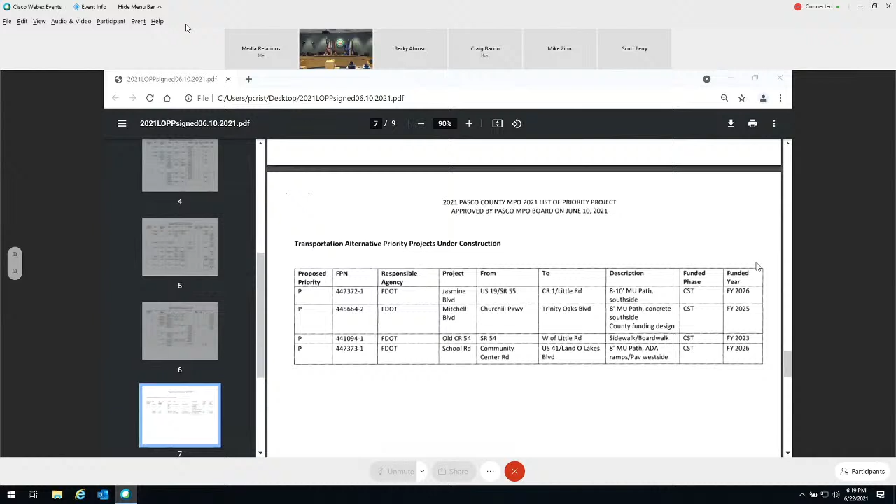All right, so that's our list of priority projects. They were approved by the MPO board on June 10th. And again, as we move forward this coming year, we're going to be ranking projects in a system that you guys get to approve and figure out as well. We'll start that pretty soon as well.

So next, I have one question before we get out of this. I just saw something that caught my eye. Okay, on page 7, what is the status of Pasco Elementary School sidewalk east, 6 foot?

So that one, we requested funding for construction. You talking about going north of Coleman? So if you're talking about that first one there, Pasco Elementary at Fort King and Hester, North Coleman, it's been funded already for the design and the engineering of it. So we're asking for the money for the construction. And usually when you get the money for design and the planning and the engineering of it, there's a good chance that we're going to get money for the construction because they're not going to invest that money up front without investing the money. And usually they work out those fatal flaws in that first part before they go to construction.

So well, my issue is we're doing sidewalk going north of Pasco Elementary School. Okay, if we're gonna do that, why can't we do it before school starts? Because I'm telling you right now, a lot of kids walk that going north. Right, if a kid gets hurt or gets killed, who's fault is that gonna be? Okay, in the same way with Pasco High School, take that road all the way down to Fort King Road, going behind the stadium. A lot of kids walk there. If somebody gets hit, who's fault is that gonna be?

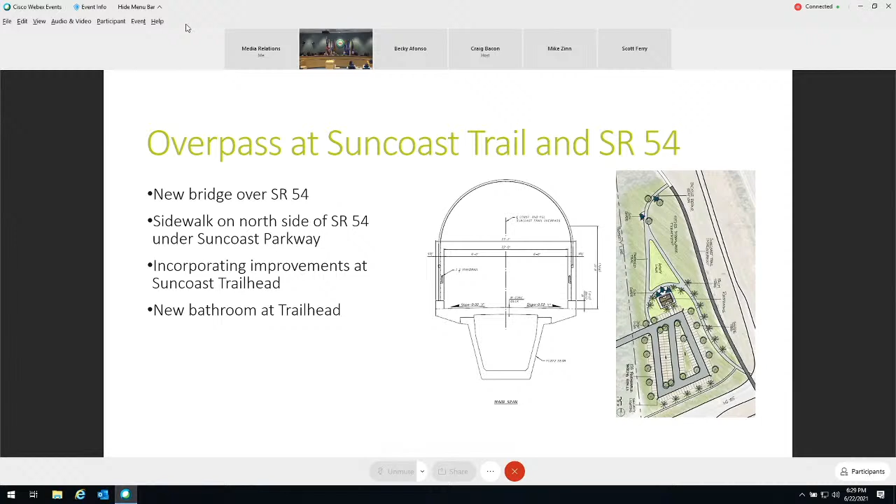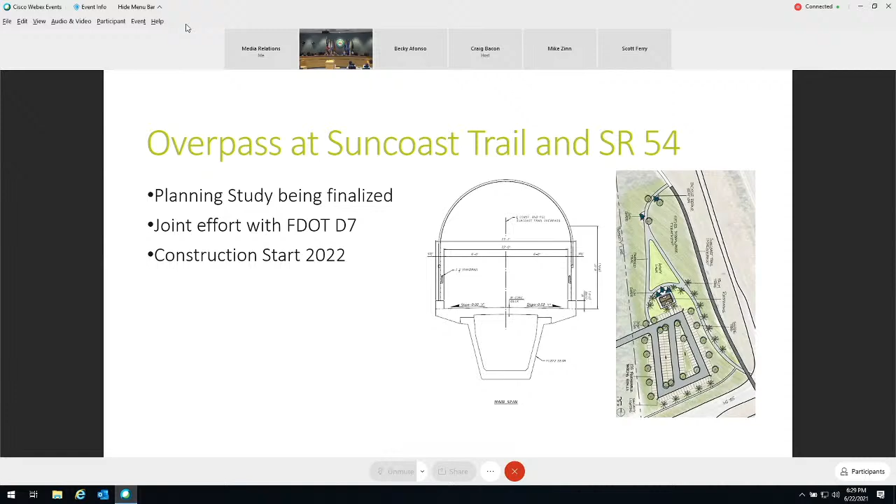So next project, and this is Orange Belt Phase 1, we're gonna call it, and this is the piece that goes along, up to basically Publix there at 54. Now this is just one piece of two other pieces, so it's really hard to tell. But this is at Trinity Boulevard to Cattle Gap Road. Publix is right across from Gun Highway and 54. It will go along that north side of 54 along Starkey Ranch area as well.

We're gonna have that mid-block crossing right there just east of Community Drive. Really great spot for a mid-block crossing. We'll go behind those ponds, so you get kind of away from 54 until you have to. So that's one part of Orange Belt that we're working on now as well.

Tina, just so you know, I'm working with, or trying to work with, all the landowners. So for everyone, that's the Trinity Memorial Gardens there. And then if you get to Gun, you see the old flea market, but that's going away and that's going to be a Lowe's. So we are trying to work with all these landowners in here to do a neighborhood grid. We've got multifamily, townhomes, industrial.

One of the things our county planners want them to do is, you can see where the shed is at Trinity Memorial Gardens. People are pointing it out, trying to locate it on the map, working out where the burial place and the crossing are relative to 54, and noting there's a line there where the county may have an easement.

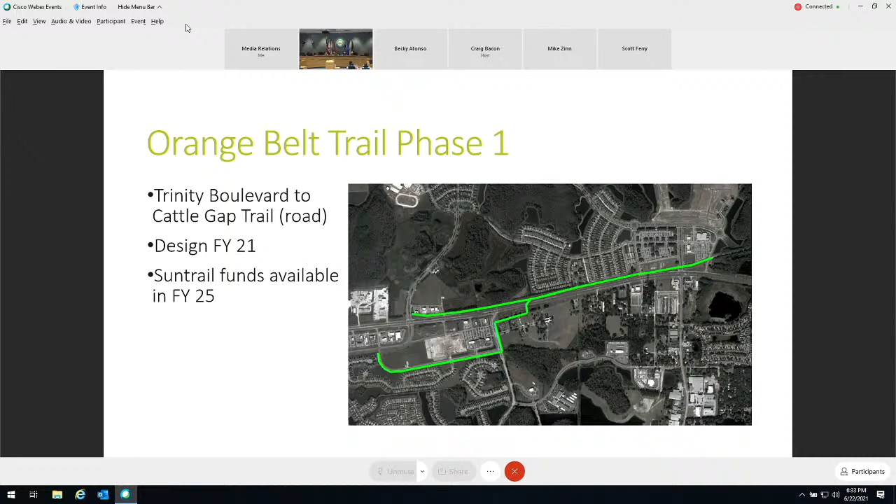Orange Belt Phase 2 next. So that's where Phase 2, we go from Cattle Gap to Suncoast, basically along the Tampa Bay water easement, and that will get us to Suncoast.

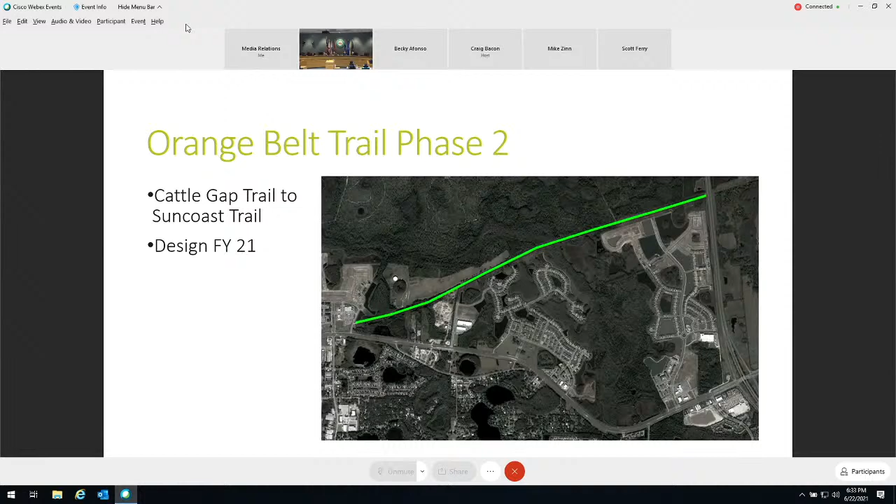Next, Orange Belt 3 is the Sun Trail application. We call it 3 because our funding's based on that Sun Trail funding source, and it will go basically from probably a little west of Little Road all the way to that connection we just saw, which is Cool Springs, then Cool Springs up crossing 54. So we basically have trail from just west of Little Road all the way to Suncoast with these 3 phases of Orange Belt — a big connection from Suncoast Parkway to basically the Starkey Gap and the Pinellas Coast to Coast Trail with this connection as well.

So what's the timeline on that? This one's being designed in '21. Most of these are in the next 5 years — in our lifetime, yep. Stay healthy.

Again, the nicest part about this is we have this funding for these 3 phases, and we actually have a little bit more to know how to go further west. We're actually going to meet with Joel and look at some things at 41 and figure out other places we can start looking at for the next pieces of Orange Belt as well.

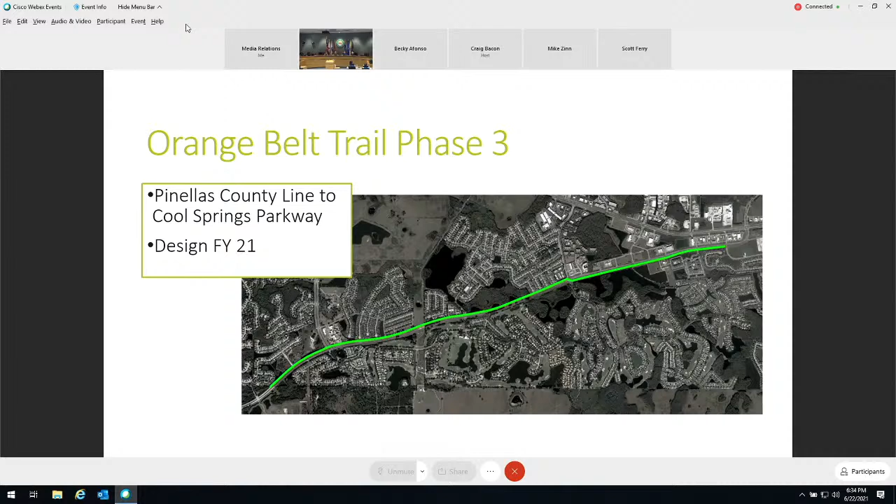Next, so that's where the Orange Belt PD&E study really looks at everything from here. We went ahead and did this because we have the land for the most part, and we have the funding. So the rest is where we're going to connect those big yellow dots, how we can proceed making the next connections for the Orange Belt — from the Withlacoochee State Trail through the Dade City Trail and all the way down through what we just looked at. Exciting stuff to go.

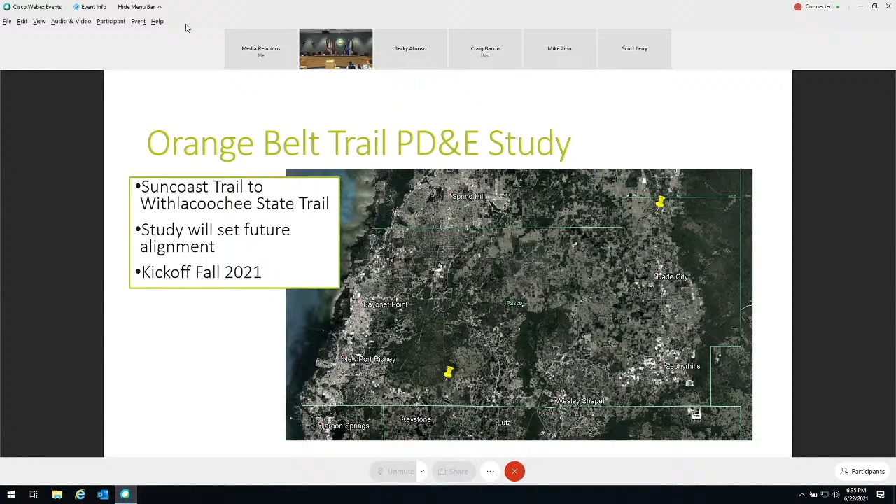And that study is out, actually — it should be closed, and we should be looking at, yeah, let's see. We had a study out for the advertisement, so we should have someone start looking at someone to do that study as well. That's really good, exciting.

Next, so this is the 5A bike trail. This is a Penny for Pasco project. This one's really, really important. It basically goes from Little Road to Hudson Avenue. Hopefully we can start looking at some safety improvements that go from Hudson to Old Dixie in that whole 19 area, so hopefully this will just be the start of some things we can do up in that northwest corner of the county to make safety improvements. But this one's set for construction in 2022 as well.

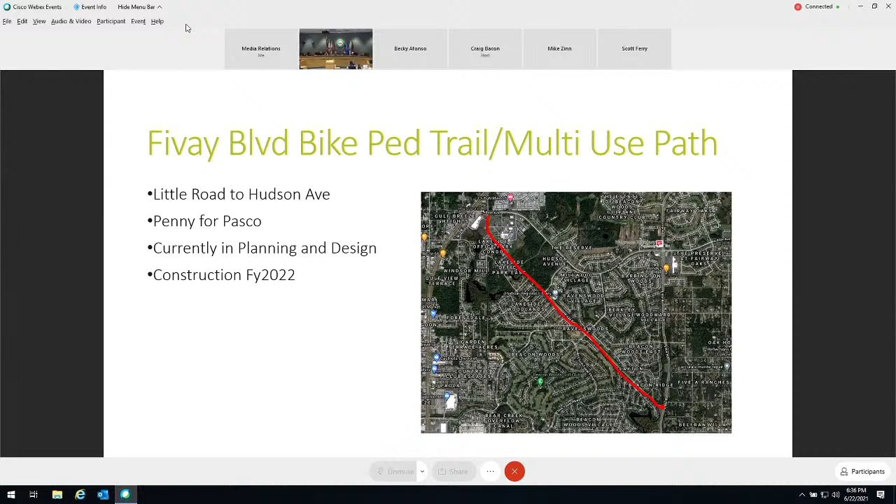Is that the 300 acres the county owns where it gets wiggly? I think, yes, it is. That's the utility property? Yes. They're still working through that section — so it didn't get sold? No, no. Good.

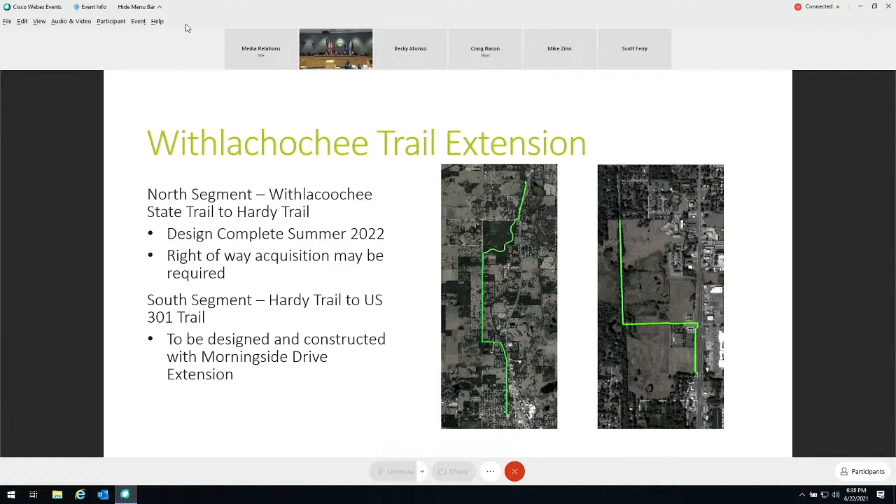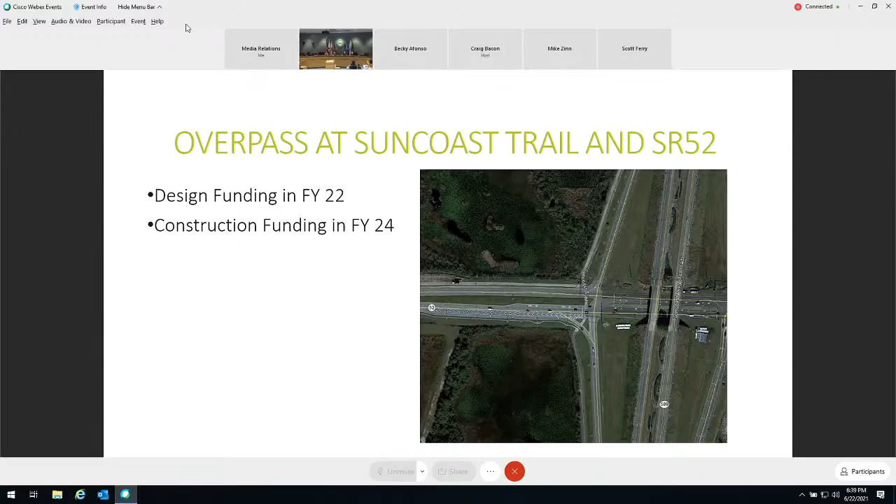I did talk to Secretary Gwynn, because when I drove the Suncoast going up to 98 in the Panhandle, I saw an overpass being constructed in another county - Citrus, or was it Hernando? It's 98, and they already had the other one, and 50, that the state paid for. I said, why do we have to keep paying for ours and y'all are paying for theirs? He said they've got a lot of money and they're working on it. Seriously, it's not fair.

We shot ourselves in the foot because we didn't ask. Both of those were negotiated, especially the one at 50, probably 30 years ago. I blame that on my former county administrator, John Gallagher. But there's no reason I can't ask now and say, live and learn, pay us back.

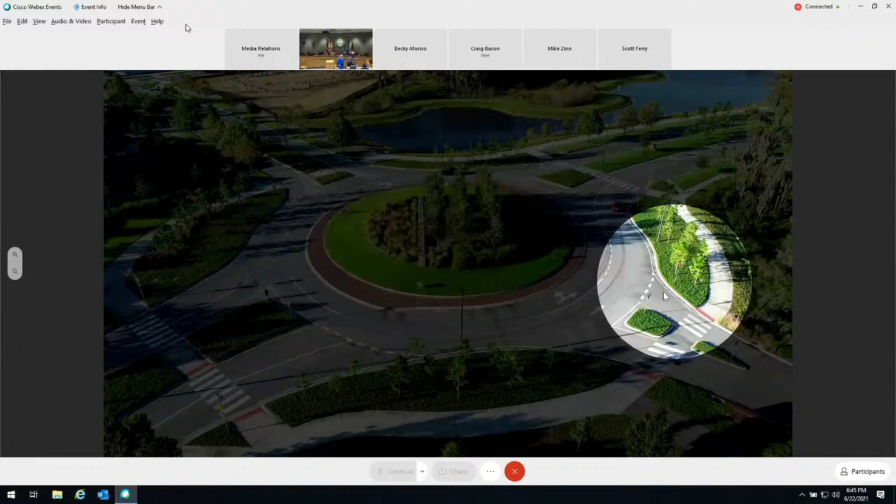So I'm gonna take this lane, and what I do is I'm gonna scan behind myself and see what's coming and how fast they're coming. If I can give them enough time - I wear a mirror, but I have to scan. I use a mirror because it just makes me aware of vehicles behind me. But I'm gonna see what's coming behind me before I take that lane. It depends on what the vehicle's doing, how fast it's going, and how big the vehicle is. So I'm gonna take the lane.

So I'm gonna do that way before that, and it depends on what's behind me. If it's moving fast, I'm gonna take that lane pretty quick because I'm not gonna get pinched coming into that roundabout or run over. So I'm gonna take that lane, come in here, and take the lane. The nice part with this roundabout is there's a dual purpose lane on the outside, so these folks, when I take this lane, have plenty of room to come into that other lane. That video that Casey took, you can see where Debbie and I are in that lane - they take that other lane, no problem. They might have to slow down, but they have plenty of room to do that.

And then once I get to the other side, I'm gonna make sure I negotiate that curve before I get back into the bike lane.

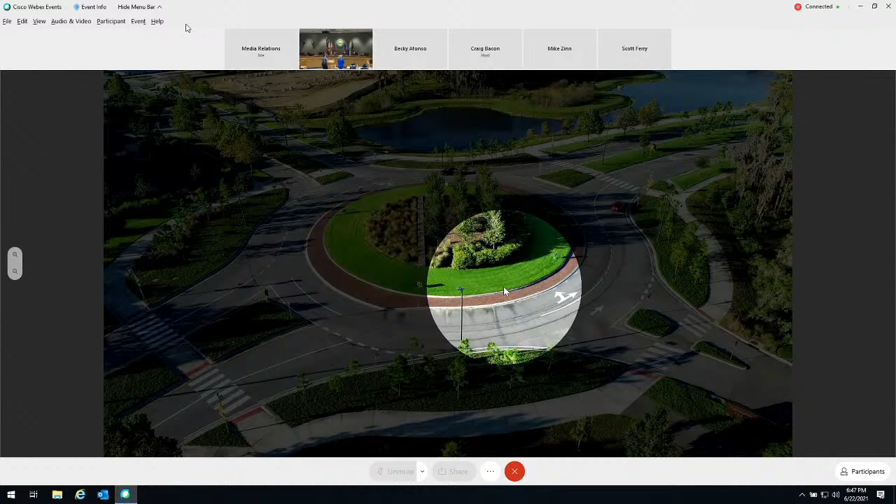So when you use the multi-use path, I'm going to come down here. I still have to cross that road. Do you think vehicles are looking for you that far back off of that roundabout? Probably not. So when you use that multi-use path, you need to be very aware of who might be coming out of here, and the biggest problem is who might be coming in from this way, which is really hard to see. You got to be very aware, and then you have your regular crossings with your RRFBs as well. But these side paths along the back side of the roundabouts just need to be very, very careful.

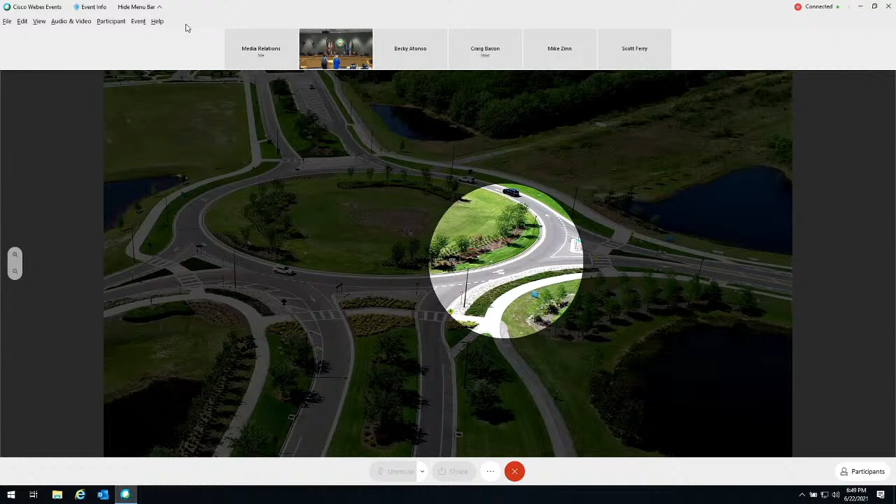So this is Bexley. Again, totally different situation. It's not a dual destination lane, so you actually share that lane. There actually was a crash on this one, but you can see it's one single lane, so everybody shares that same lane. When you take that lane, you need to make sure you're aware of it as well. Definitely a totally different roundabout, and the one before this one is different than this one. It actually has a right turn lane and a single destination lane on it.

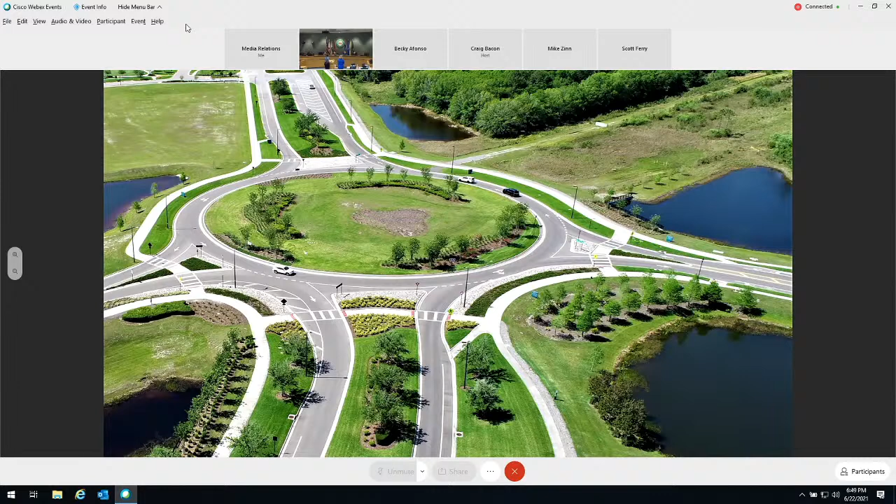Any questions on those so far? So most folks, do you ride on the bike lane or do you ride on the multi-use path? Multi-use path for me. Yeah, me too. Bike lane. So this one's even more fun.

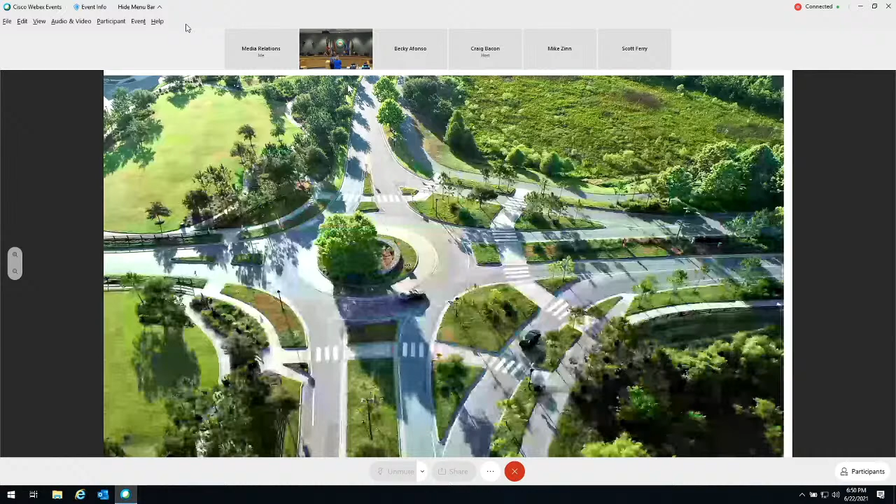Heart of Pine has very designated lanes. Each road has its own designation. The real fun part about Heart of Pine is if I come through here, especially the Longspur, which is one of my normal routes, you have to be careful of that flying right there coming off there. Especially because you're kind of in a blind spot being far off the back, so that's where you need to be really out in that lane for you to be seen. When you come around, just be aware of your surroundings. But look how much character these trails have. They do, very much so.

And then, of course, you have the bridge on this one further down where you have to cross as well, and that's the one that is rangeland, that's the bridge. This was where we were just telling you about that. Here, you actually have to go to one side because the bridge only has a trail on one side, so you actually have to cross to one side to get over. And that bridge is going to be fixed. I've been sending those pictures in. It's really bad right now. That wooden bridge is really fun to ride over too, and it's in bad shape, but it's getting fixed. The boards are sticking up.

So those are different, beautiful shots of roundabouts, and each one is different. There's RFBs at several locations of these - there's RFBs here, and there's RFBs here. Those are rapid flashing beacons that a pedestrian hits, and they start flashing.

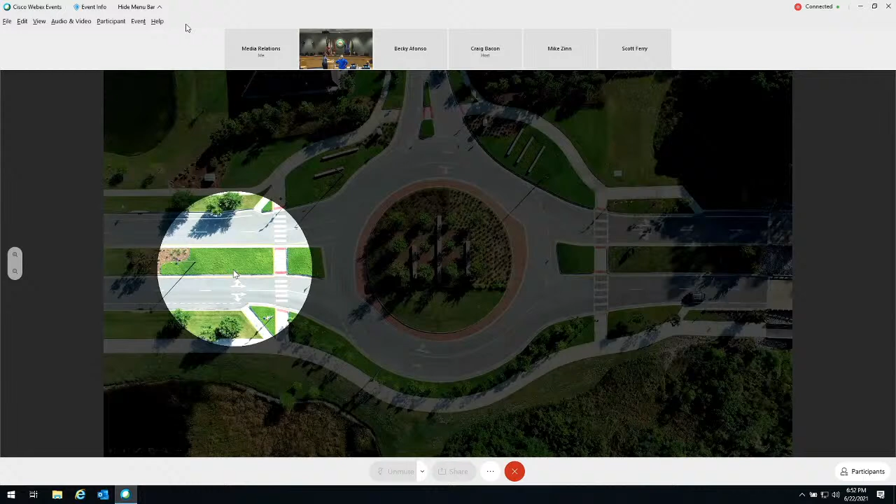So one day riding, there was a gentleman driving a little too fast here, and with the double lane roundabout, you can get your speed going a little faster than it probably should. A family of three, one of them with a tag along, was crossing here because the bridge trail's only on one side. So he hit the RFB, he's halfway through here, never saw this guy. Luckily the timing was wrong for this guy flying through this roundabout, because again, he could not see those people crossing the road on that north side there. So just be aware of your surroundings.

And then I'll let Casey talk through some of the others. Yeah, and the roundabouts that we're showing you, Commissioner, you're right, they're beautiful, they add so much character. When we've been out observing, as Tina said, for Vision Zero, she has us out riding, walking, observing. I've walked from the park to Publix and back, and we've ridden all the trails.

You watch human behavior, and that's really what Vision Zero is about, is to see where we make decisions that are not always to our best interest. We're not paying attention. As we go forward with Vision Zero, we will identify areas that are having more struggles than others, basically either by people telling us that it's happening, unfortunately maybe by Signal 4, and try to do more education campaigns out there if we need to with the communities.

Tina has requested some law enforcement out there, and I've seen them at the various roundabouts slowing some folks down, which is good because you get cranking on that road. It's a long road, especially if you're going to Publix. So a lot of Vision Zero, we can't solve everything. We're trying to identify the areas having the most difficulty with human behavior decisions. Even though the signals are there, we don't always follow the rules.

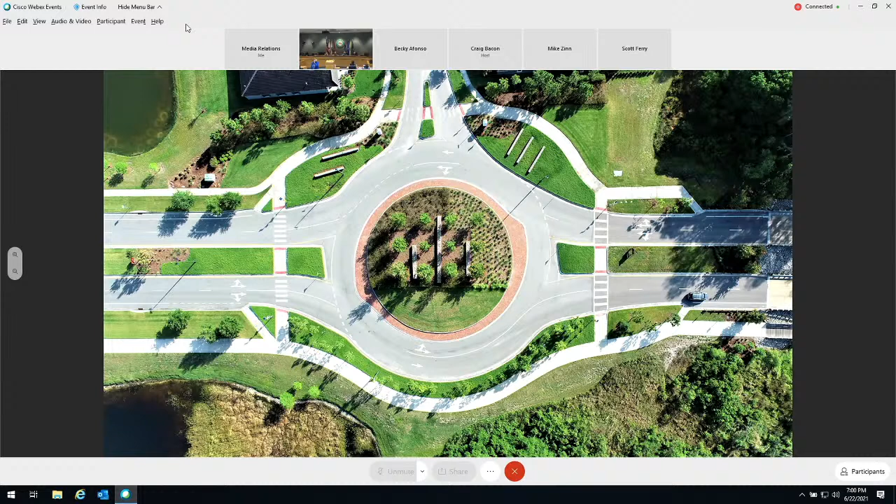Thank you very much, I'm Rob Kersey with Tindale Oliver, and I want to brief you on a task we're doing right now for the MPO for active transportation data development. And I would like to state for the record that I always yield for pedestrians, and Tina and Casey especially - so no problem there. Let's go to the next slide.

Oh, my slide's not up. Oh, okay.

There we go, look at that. And I can advance it. There we go, there you go.

The purpose of our task is to inventory existing facilities, and we've been at this for about 2 or 3 months. Primarily, we're looking at all non-motorized vehicle facilities. I've listed some of them: sidewalks, multi-use side paths, trails, bike lanes, greenways, blueways, and crossings. We're trying to get a comprehensive list of what is out there.

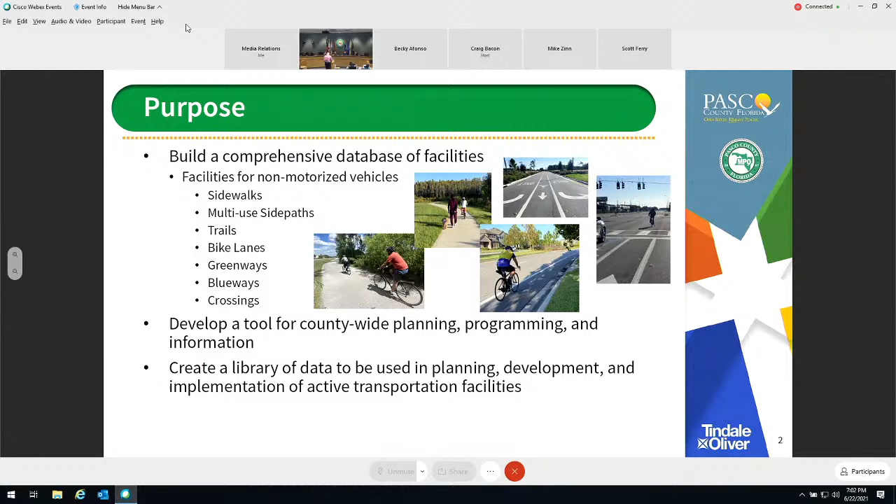The purpose of this is really to develop a tool for countywide planning, programming, and information. It's not just to create a map—that could be a byproduct—but we really need a geographic database that houses all this information, which can be used for the development of an active transportation plan, and used by county staff and the MPO daily, especially in a highly developing county, to make decisions about connectivity and planning for active transportation.

Our scope was comprised of 6 elements: an inventory of the existing data sources—I'll show those later, there were quite a few—and assembling all that data into one location, basically where Tina can get her hands on it and start formulating a comprehensive plan for active transportation.

We wanted to identify existing gaps, not gaps in the system—we're not doing that analysis yet, that'll be part of the plan development—but gaps in the data. Do we not have good sidewalk data? Do we not have comprehensive information for the trails, things of that nature?

We also want to take a look at mapping and demographic analysis, because as we get into developing a plan and prioritizing new facilities or extensions of facilities, demographics play a part. Where are the people who need those facilities? So we're looking at the demographics and economics within the area, the specific characteristics of some of the citizens and workers, to make sure we have that information.

Also looking at crash data, which will go a long way toward prioritizing some of these projects and making sure we're programming safety improvements into new facilities or retrofits, and also into the design of new facilities. Then also reviewing current plans and standards—we need to see what the county is pushing out in new developments and talk to developers about those standards, making sure that as new plans go under development for new communities, they're developing facilities compatible with what's already on the ground.

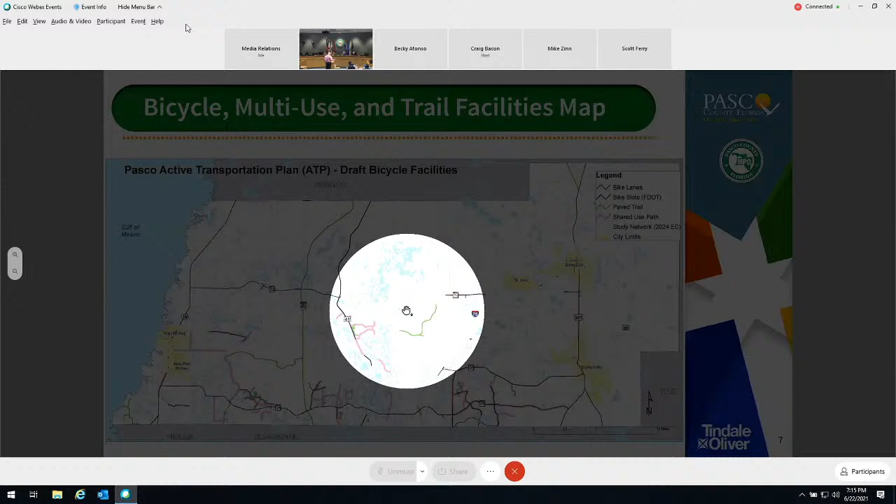That green one west of 41, is that Connerton? I don't know, what is that? No, it's not. Paved trail. East of 41. The pink is the one right in the middle, in the middle of nowhere. What is that? You see what she's talking about? I see, you talking about the pink one? She's talking about right there, where the hand is. That green thing there? That's in the middle of the well field, that's Cypress Creek. There's a paved trail in there? Yes, that's Cypress. I gotta get on that. No, that's a different place. That's Cypress Creek well field. But it's not on 41. No, this is out in the middle of nowhere, right next to Joel's house. But there's so many things missing here. Collier Parkway's got a bicycle path or sidewalk all the way up, but those aren't even shown. This is just the bike path, not sidewalks. That's a trail, the other one was the sidewalk.

But it does show you how much work we have to do. Yes, there's still a lot to be done to verify some of these locations, to build, and to create that connectivity.

So, as I said, we're a work in progress. Our task work order does expire at the end of the fiscal year, at the end of June. So we're...